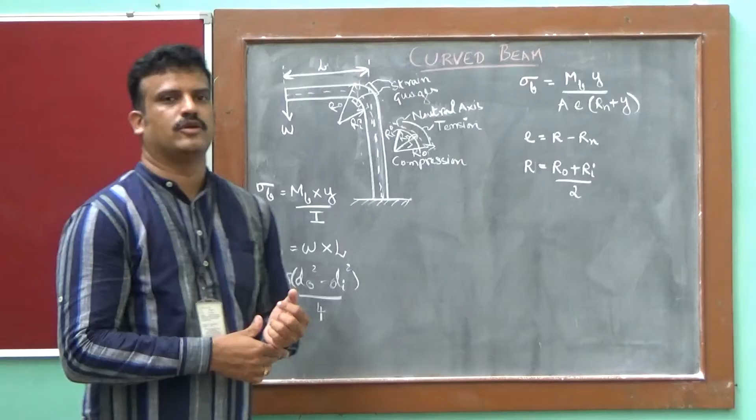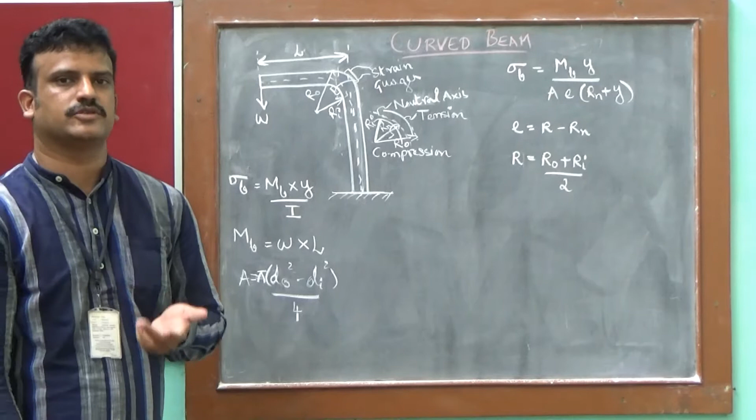So today I am going to explain to you the curved beam experiment that is in the syllabus. As you know, you see curved beams in most applications. The simple thing that comes to mind is a hanger or a crane hook, right? There you can see the profile of the beam is curved. And obviously whatever stress analysis you do for a straight beam is not applicable for a curved beam.

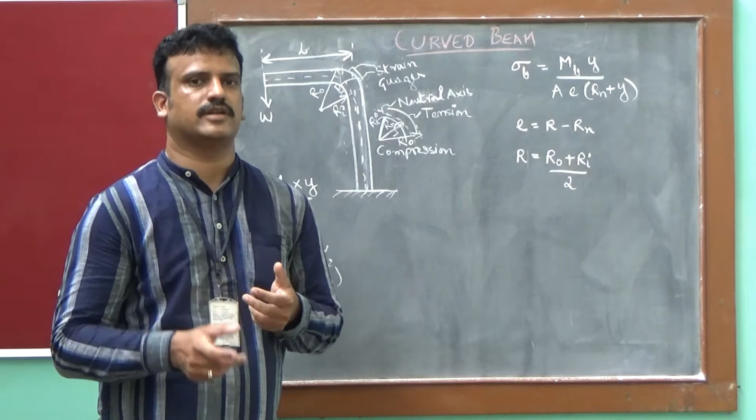A curved beam behaves differently than a straight beam, and whenever something is curved, the stress developed will not be only tension or compression; it will be a combination of both tension and compression. That means some of the fibers will be under tension and some under compression. In this experiment you are going to learn which fiber is under tension and which is under compression, and finally you are going to find the maximum bending stress, which is on the inner fiber.

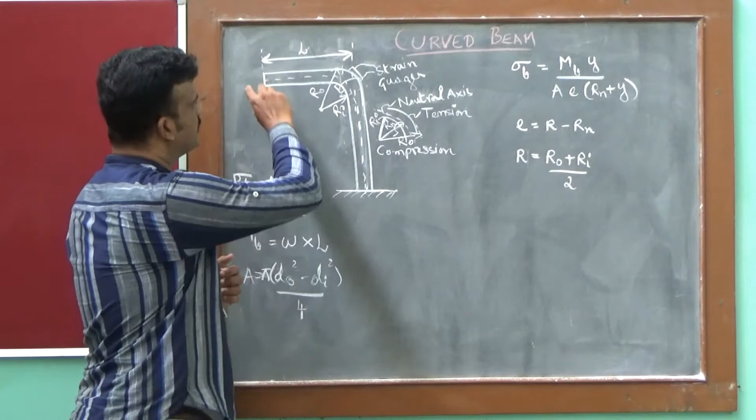The experimental setup looks something like this. It has a simple curved beam, in this case a hollow circular beam, bent like this in the form of an L. At the end of that L you have a weight which is hanging. The setup is a very simple one, and you can see here the strain gauges used to measure the strain are mounted on either side of the beam, one on the inner side, the other on the outer side.

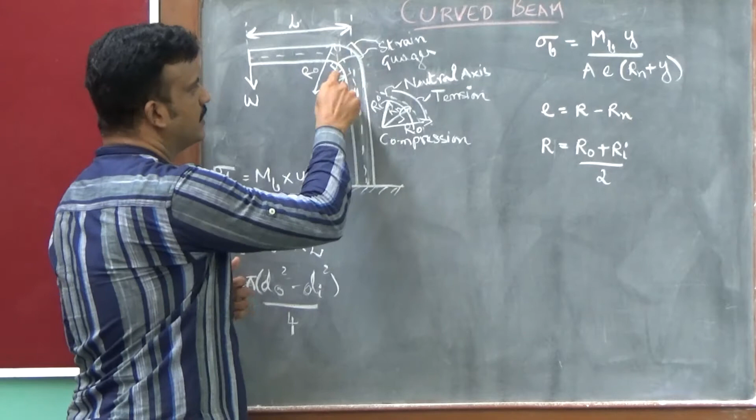The inner one will be under compression and will measure the compressive stresses, whereas the outer one, which you can see here, will measure the tensile stresses, right? Obviously it's not stress that it measures, it measures strain, and finally you convert that into stresses. It measures compressive strain and tensile strain. So the setup is very simple, with two strain gauges mounted like this, one on the inner fiber, the other on the outer fiber.

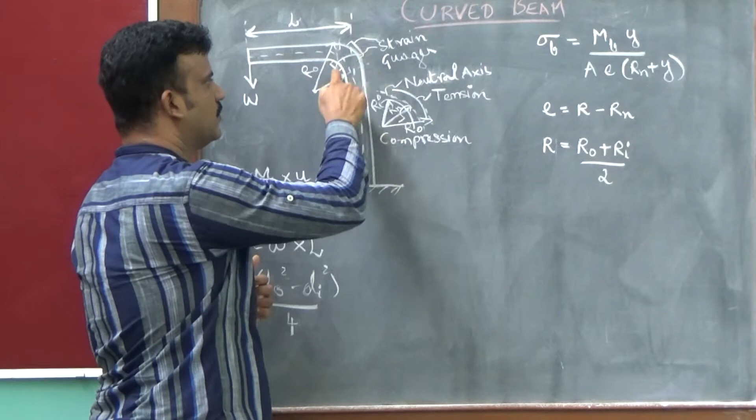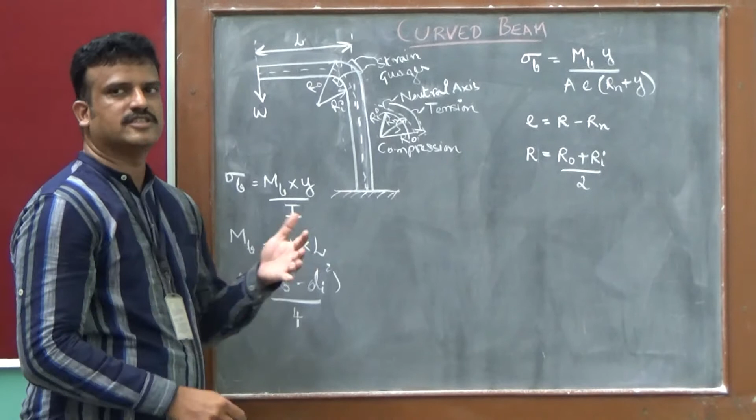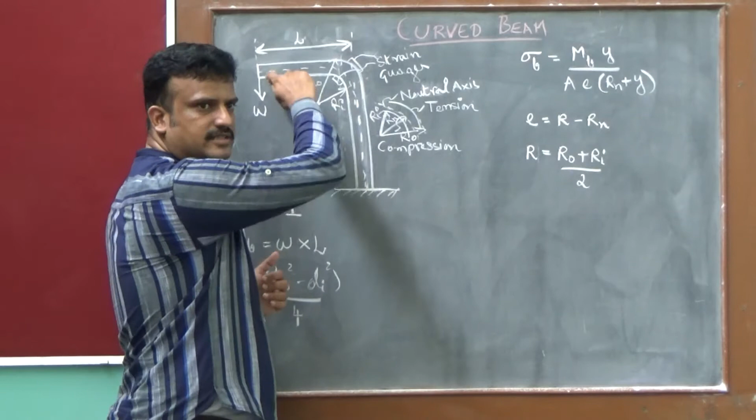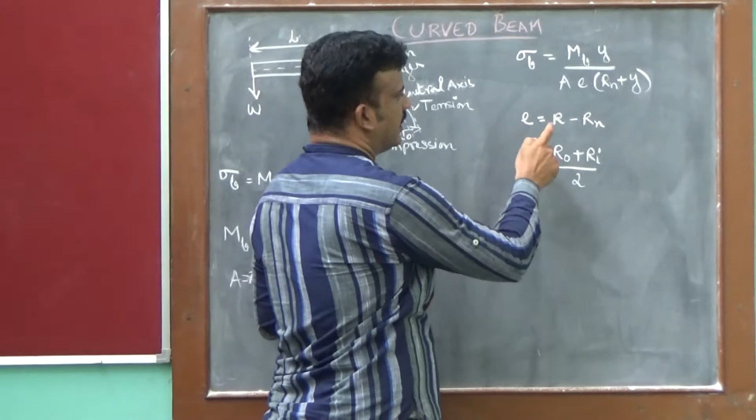In any curved beam you also have a centroidal axis and a neutral axis. In a straight beam the centroidal axis and the neutral axis are the same, whereas in a curved beam that changes. The centroidal axis is the geometrical central axis, exactly at the center, whereas the neutral axis is not central; it is offset by a certain value. We call that the eccentricity, which is the radius of the centroidal axis minus the radius of the neutral axis. That value of eccentricity you will use later in the formula.

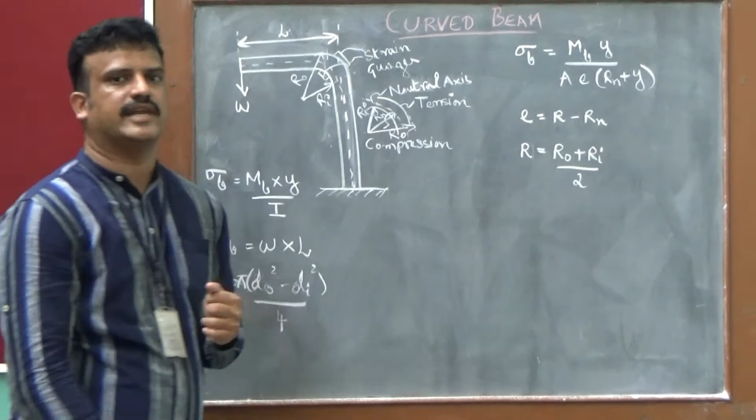In our experiment you are going to place a weight at the end of a lever, something like this, and change the weight for different cases. When you add a weight, strain will be developed in both the inner fiber and the outer fiber, which you measure using the strain gauges.

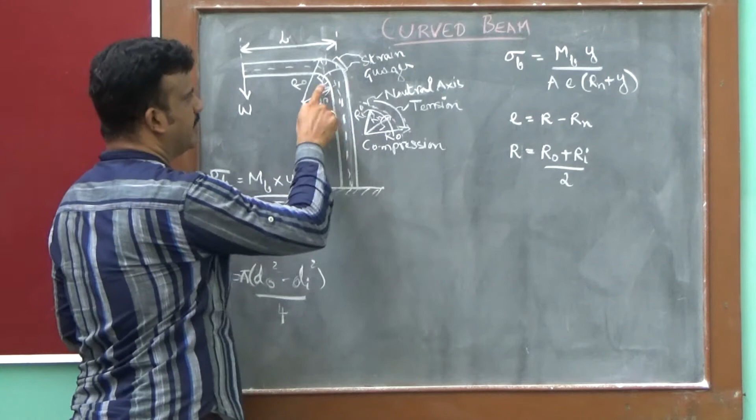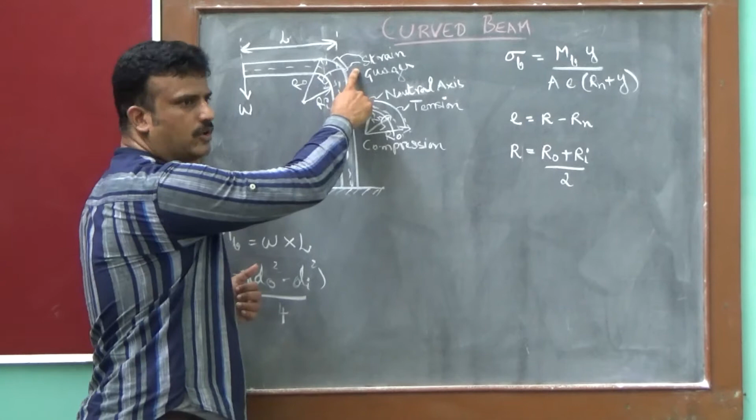When you do the experiment, the strain you get here on the inner gauge will be negative, whereas the value on the outer one will be positive. So you get a combination of negative and positive values, and the formula used to calculate the bending stress is sigma b = M y / (A e (Rn + y)).

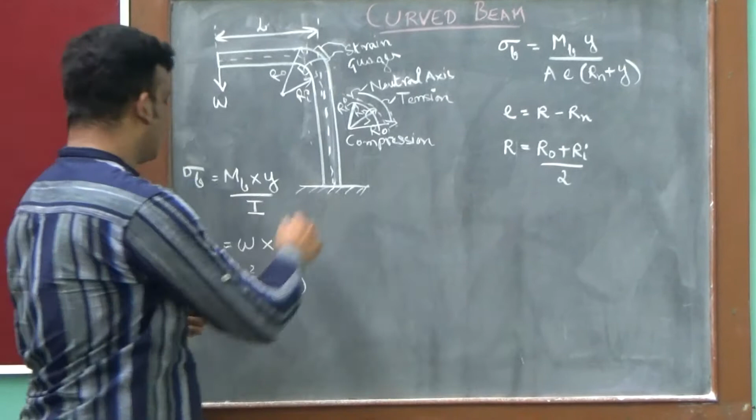This is nothing but a derived formula from the simple bending moment equation, which you know is sigma b is Mb into y by I, where I is nothing but the area moment of inertia. In this case it's a hollow circular cross section, right?

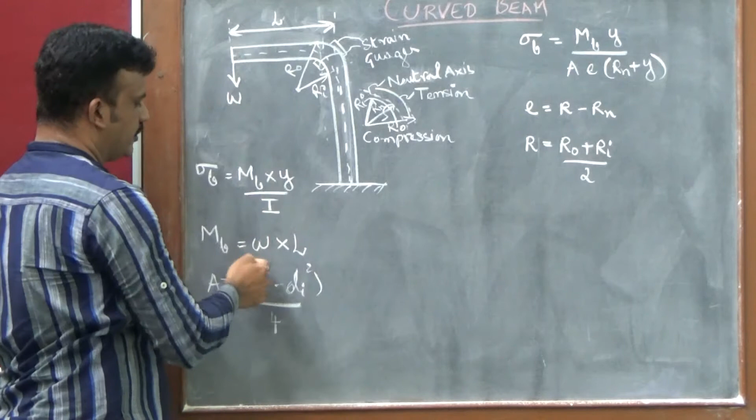Here you can calculate the value of the bending moment by just multiplying the load applied with the distance between the centroidal axis and the applied load. When you do so, you will get the bending moment that is applied onto the beam, and you can also get the cross sectional area. As in this case it is hollow, it is pi into d0 square minus di square by 4. That will give you the cross sectional area of this curved beam.

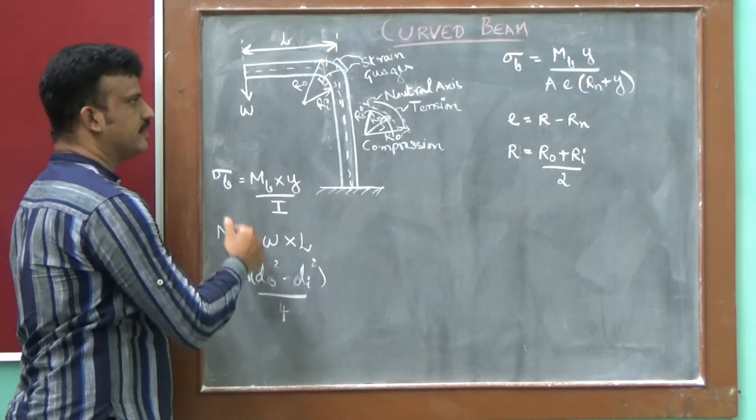Once you get all these values, you can substitute them in your bending stress equation. You already know the value of Mb, you know the cross sectional area, you also know the eccentricity, and you know the radius of the neutral axis, which you can get from the formula in the design handbook. So you can use that Rn value.

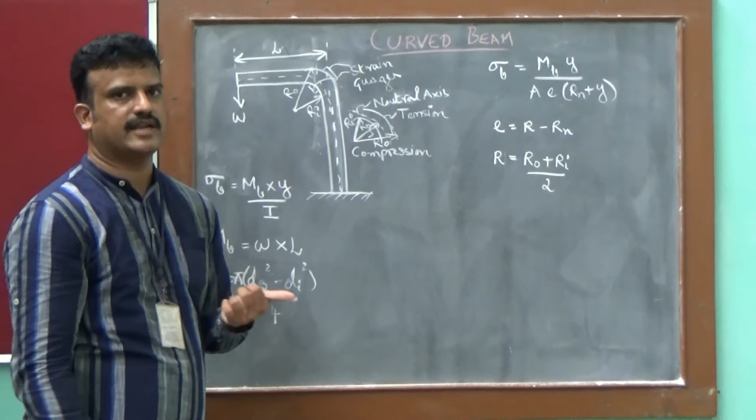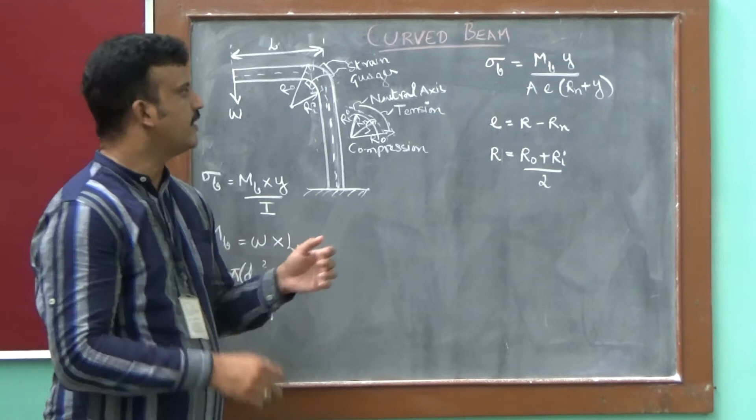That Rn value depends on the cross section. If it is a hollow circular section, the Rn formula is different. If it is a trapezoid, again the Rn formula is different. If it is a square, again the Rn formula is going to differ. So you can choose the formula for Rn from the design data handbook, right?

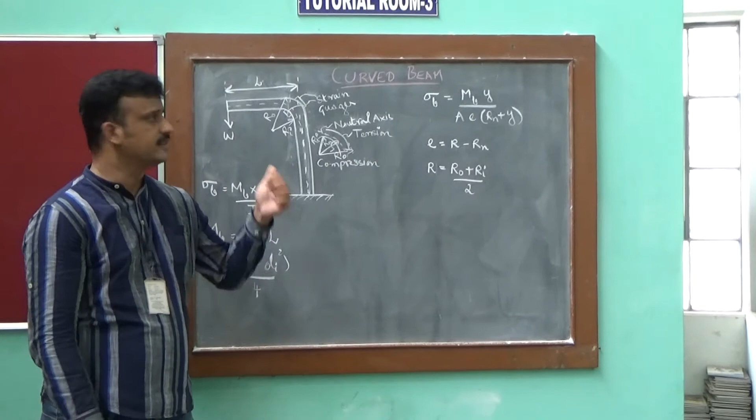Here y is nothing but the distance of the fiber on which you are going to measure the stress. In this case I am going to find the maximum bending stress, which obviously will be on the outer fiber. So the y you take will be the distance of the outer fiber from the neutral axis.

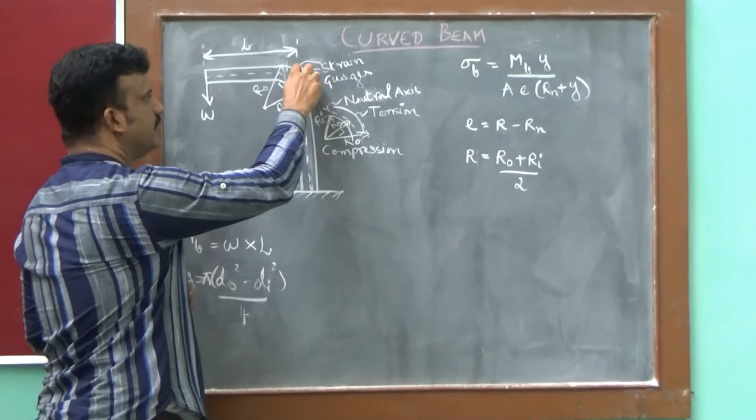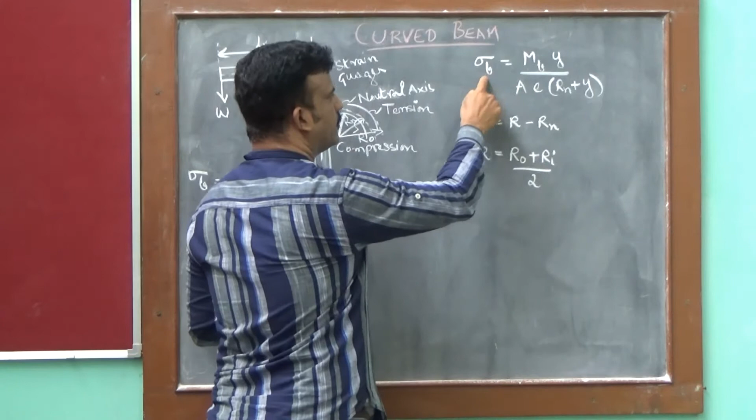That will be the value of y, and in most cases it will be nothing but the radius of the outer fiber. That is the value of y you are going to substitute here. Finally, using this formula you are going to find the bending stress in this particular curved beam. You are going to do this for 3 to 4 trials.

By changing the load you apply, you are going to measure it using the strain measuring device, which will give you the value of strain directly. Later on, using that, you can calculate the value of stress. So this is the simple experiment on the curved beam, where you are going to find the bending stress on the outer fiber of the curved beam.

Hello students, as I explained in the theory, this is how the curved beam setup looks. You can see it is in the form of an L, with the base which is fixed here and the other end which is free. The weight is suspended from the free end, and the distance between the point where you apply the weight and the axis of this shaft is 256.7 mm. You are going to place the mass on this end of the curved beam.

Here you can see the setup. You have two strain gauges, one here on the outer fiber and the other here on the inner fiber, and these two are connected to the channels of this meter at A and B. It has 4 channels. The inner fiber is connected to channel number 1 and the outer fiber is connected to channel number 2. In the setup you can see we can toggle the knob between channel 1 and channel 2.

Suppose you want the value of strain on the inner fiber, you have to turn it to 1, and if you want the value of strain on the outer fiber you have to turn it to 2. So you toggle it and get the value of inner and outer fiber strain, right? So the setup is very simple.

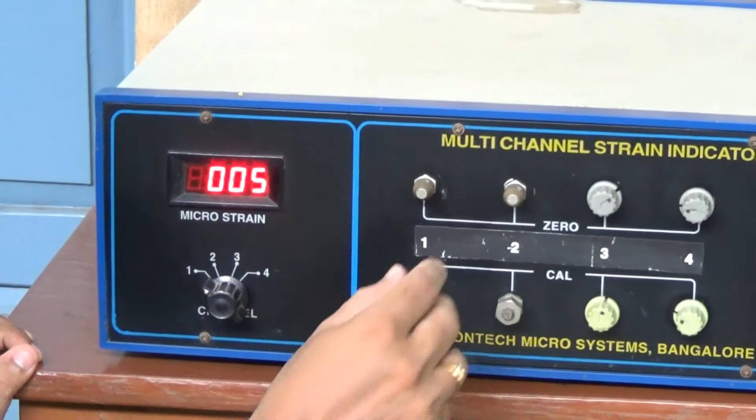It has only 2 strain gauges which are mounted, what you can see here, and this is the free end of the lever. So in the trials you are going to add different weights on this, and you are going to measure the value of strain which you get here. So what you have to do initially is turn the knob to 1, where you have to measure the strain in the inner fiber, and you can adjust it such that you get 0 value on the display, which indicates it is now calibrated.

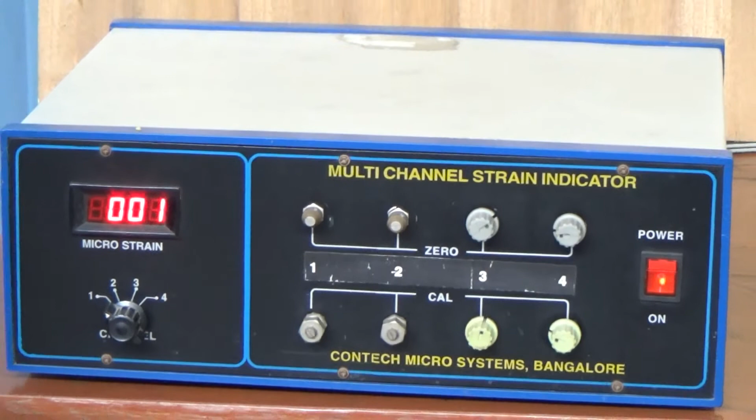And now when you add the weight, you are going to get the actual value of strain on the inner fiber. So right now you can see it is 0. It may toggle slightly because of the variation in temperature or even in the variation of the electricity, so there will be some changes in the value. It's okay. So it is now 0. So now as the knob is set to channel number 1, it is going to measure the strain on the inner fiber. So I'm going to add a weight here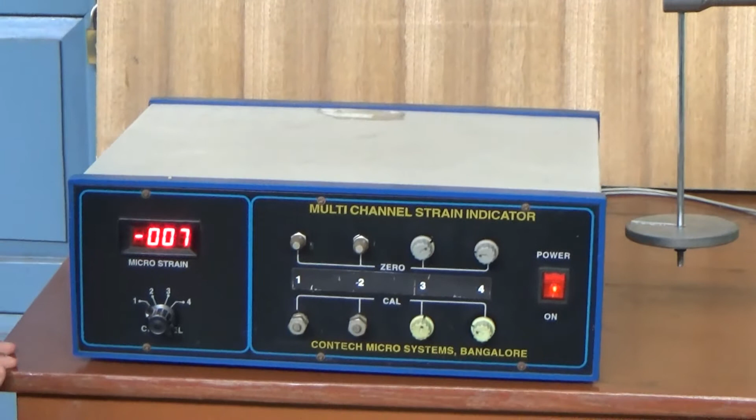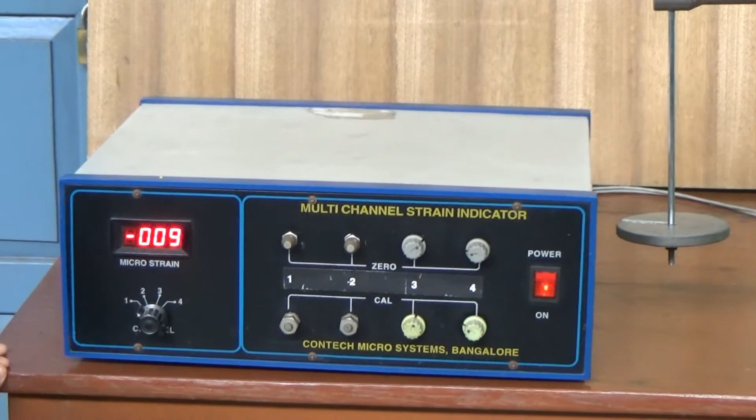and see what happens. Okay, you can see it is now displaying -007. So that means as it is an inner fiber, it is under compression. That's the reason it is showing a negative value. So that indicates the strain on that inner fiber is a compressive strain. So once you get this particular value, you can add one more load, and you can measure the strain. So like that you can go on adding different weights and go on measuring the strain on the inner fiber. You can repeat the same thing even for the outer fiber.

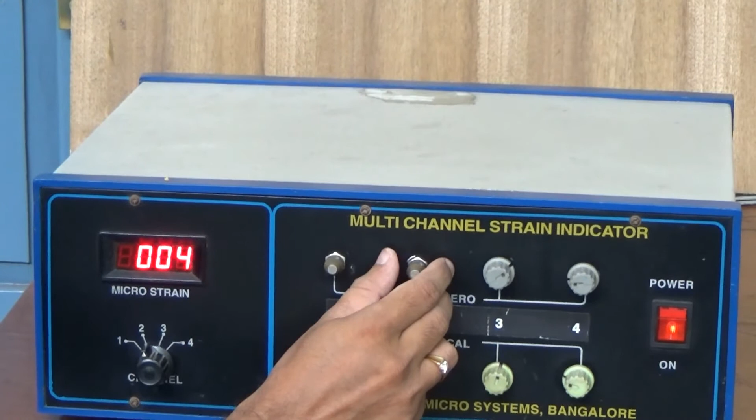So what you have to do is remove everything. Okay, toggle the switch to channel number 2. Again, you can calibrate it so that you get approximately 0 value. If you don't get it, you can take it as an error. Okay, so it is some 4. So whatever value you get, you can subtract 4 from it now.

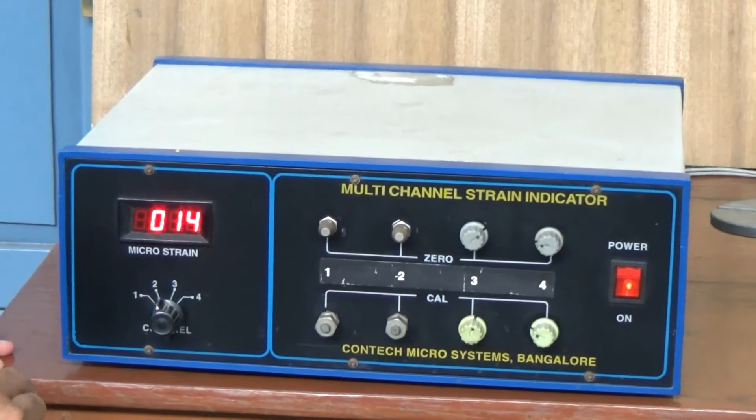So you can just see now when I add a load. Okay, you get 14. So as it already had 4 initially, you can subtract 4, so you can take it as 10. So it is plus 10. Here obviously you are going to get a plus value. The reason is it is now measuring the strain in the outer fiber, as we have toggled the channel to 2. So it measures the tensile strain on the outer fiber. So this is how you're going to do the experiment.

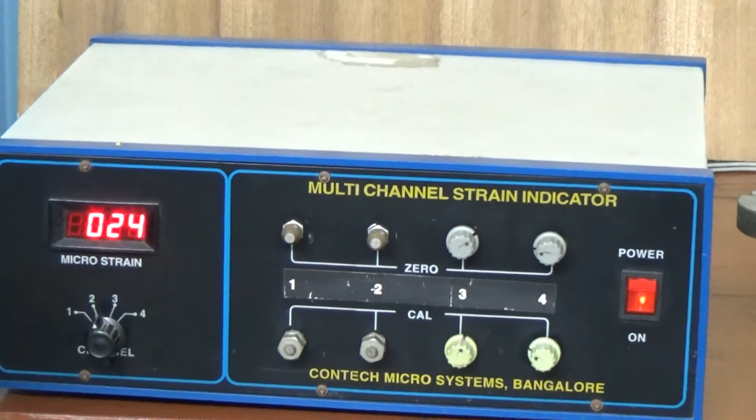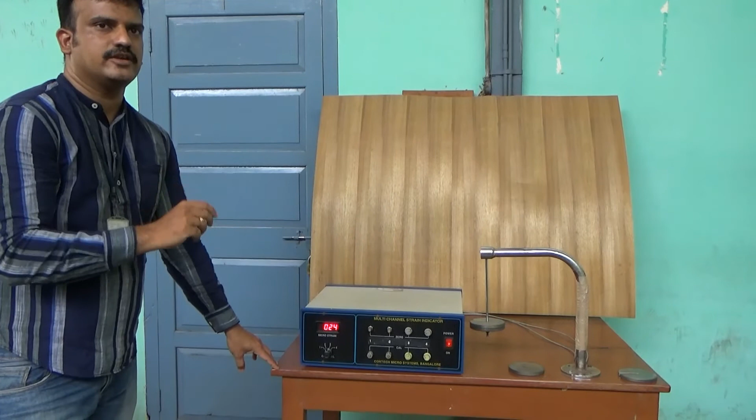Again, keep on adding the load and go on measuring the strain in the outer fiber. Okay, it is 24. So if you subtract 4, it will be 20, and you can see if your values are correct, the strain you're going to get will be almost linear. You know that till the elastic limit it has to be linear values. So if you're doing the experiment properly, it will be most of the time a linear variation. So this is how you conduct an experiment on the curved beam.

So the last thing which I have to tell you is the inner and outer radius. The inner radius of this is 19.4 mm and the outer radius is 25.4 mm, which you need for the calculation, and obviously that will be given in the manual, which will be supplemented later, right? Okay, so this is an experiment on a curved beam.